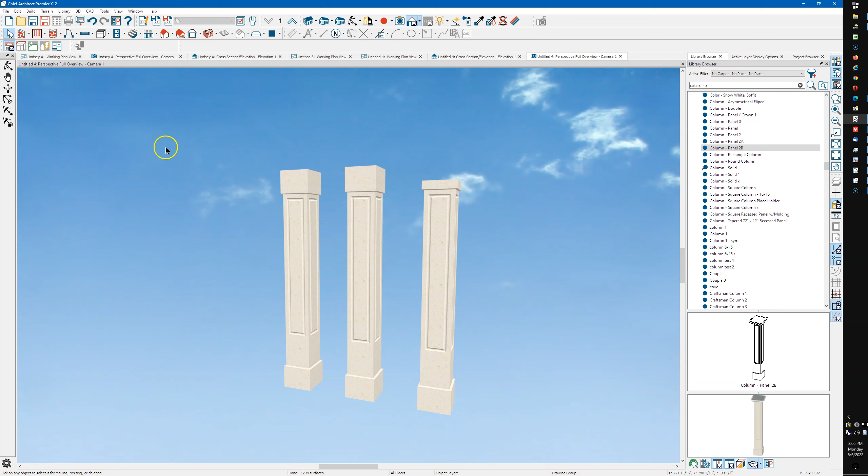Alright, this is X12. We're back on changing up these library column symbols. This is just a copy of the original, which came out of one of the bonus libraries. This is just a copy of this, and this is what we're going after.

So I want to make this 4 inches up here. That's the basic idea.

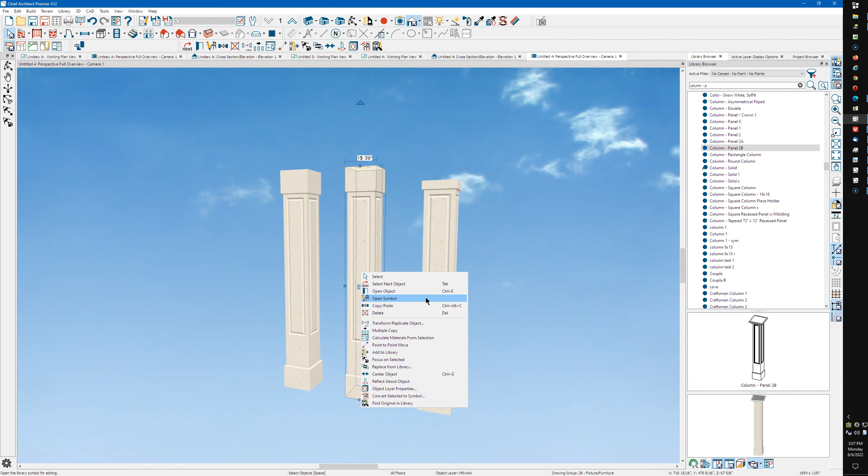So if we open the symbol and go over here to sizing, we're going to see where the stretch plane is, a single stretch plane, and this is how it comes from Chief. You've got a stretch plane here, and in the z-axis, if you stretch the symbol up or down, it's going to stretch about this plane.

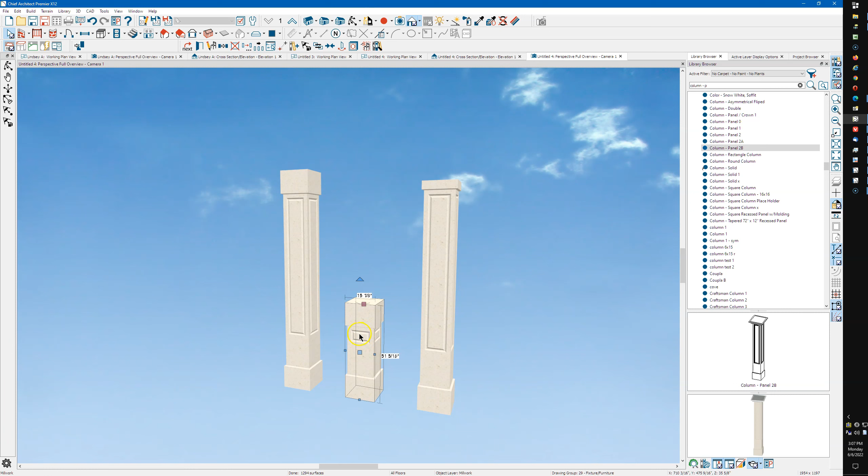I can stretch it down like this, compress it, and this raised panel part just gets smaller, or I can raise it up, same thing. This stays the same, this center part just expands.

So I'm going to control Z a couple of times, just open the symbol back up, and I'm just going to change this.

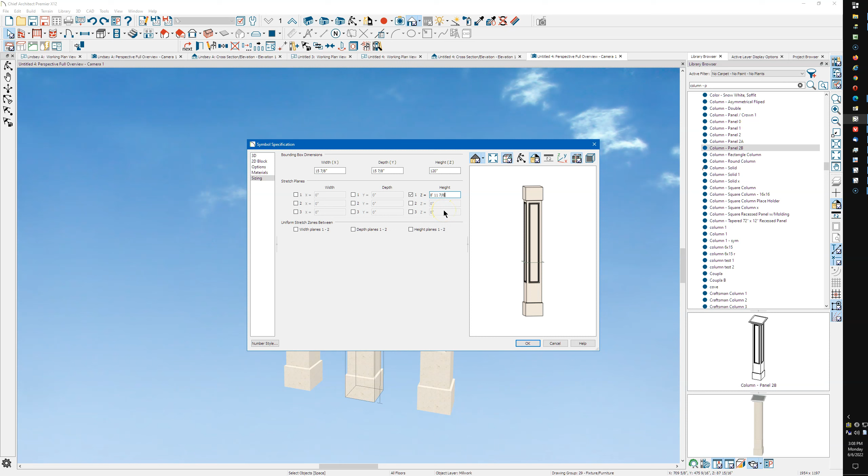I know from the previous video that this is 8 feet 11 7/8. Hit tab. Then what I've done is I've put the stretch plane right up here at the top. And I'm going to say OK.

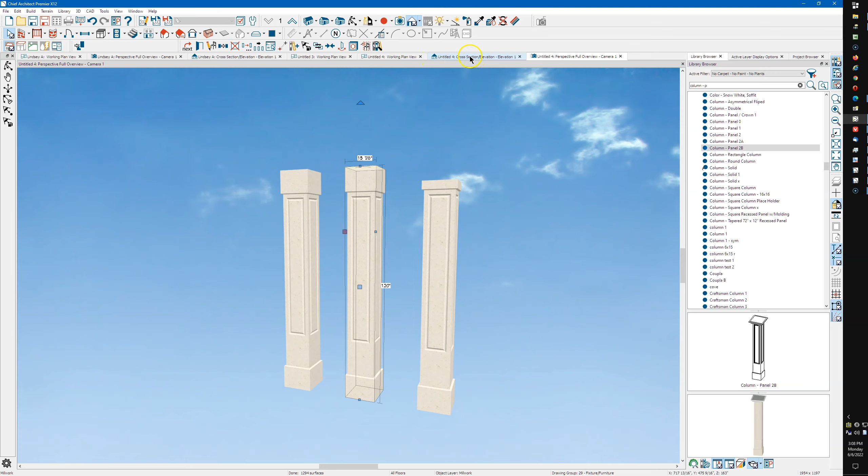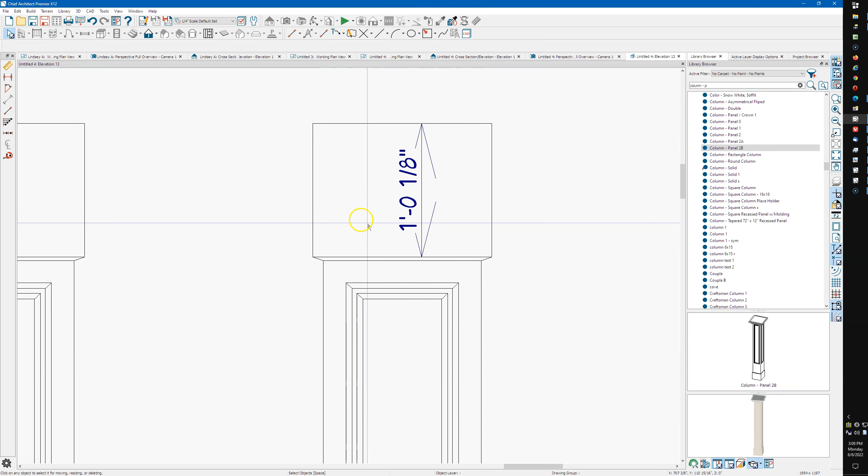And I'm going to do CAD detail from view. Let me get this dimension. So I want to reduce the height of this symbol so that this top piece right here reads 4 inches instead of 1 foot and 1/8.

So we go back over here. I'm going to put minus 12 1/8. Hit tab. And you can see that took it away completely.

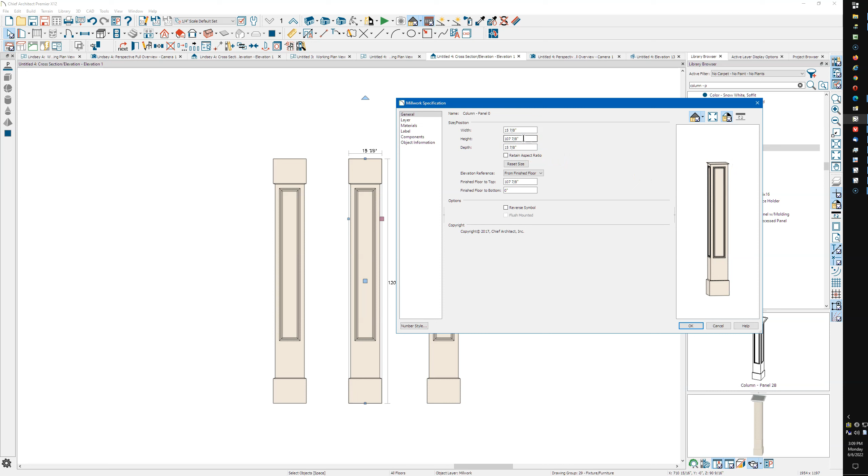And then I'm just going to add 4 inches to that. Hit tab. And then you can see that added 4 inches back. Say OK.

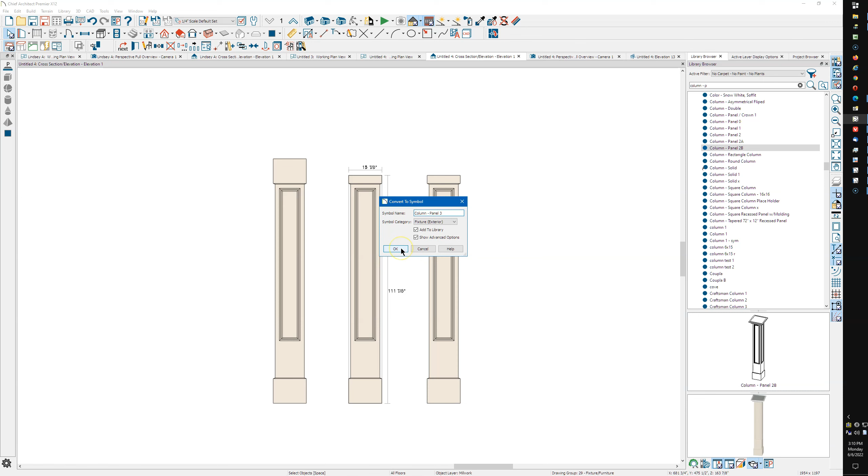Now I'm going to make a new symbol. Say OK. Make this 30. Go to sizing. Just going to use 50, which is what the original was. Say OK.

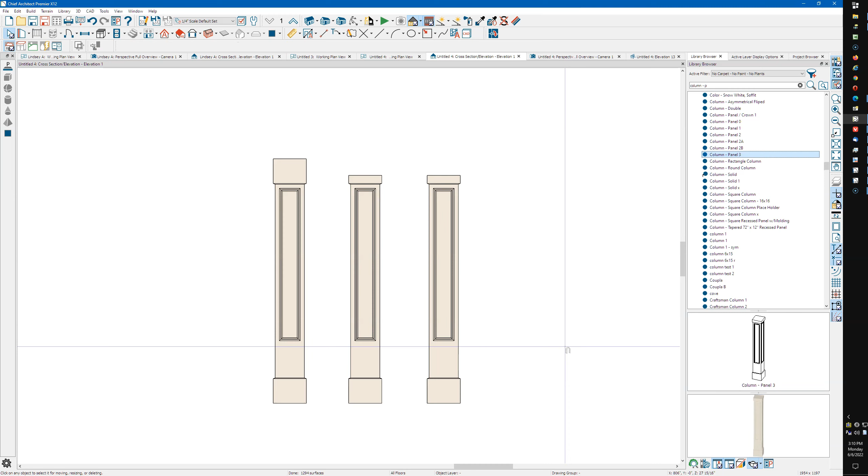Let's put this over here. Now this is the one we just made, it's a new symbol, and it's set to stretch just like this original does.

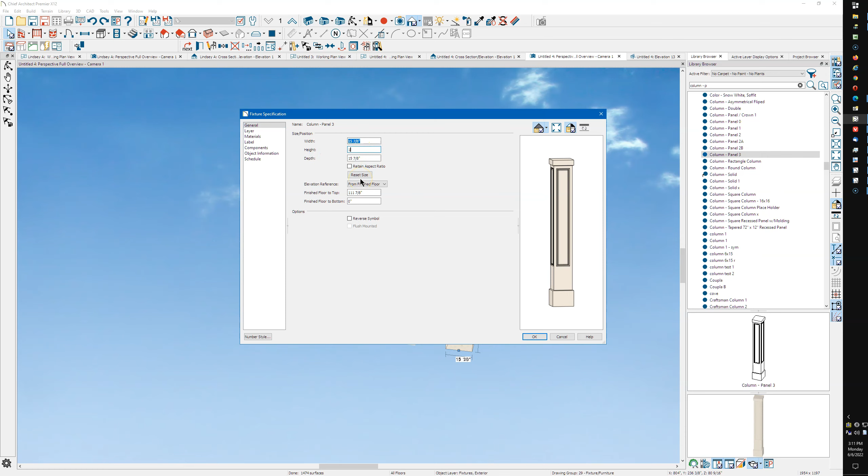So you can use the same basic techniques to change this. I'm going to open this, put it back to 120. Open symbol. Now you can see here that it's still, the symbol still thinks it's 111 7/8.

So if you wanted a new symbol that's 120 inches tall, you'd need to save this. You'd need to create a symbol, you need to go through this process again. You don't have to, but to save this in the library as a symbol with these parameters, that's what you would want to do.

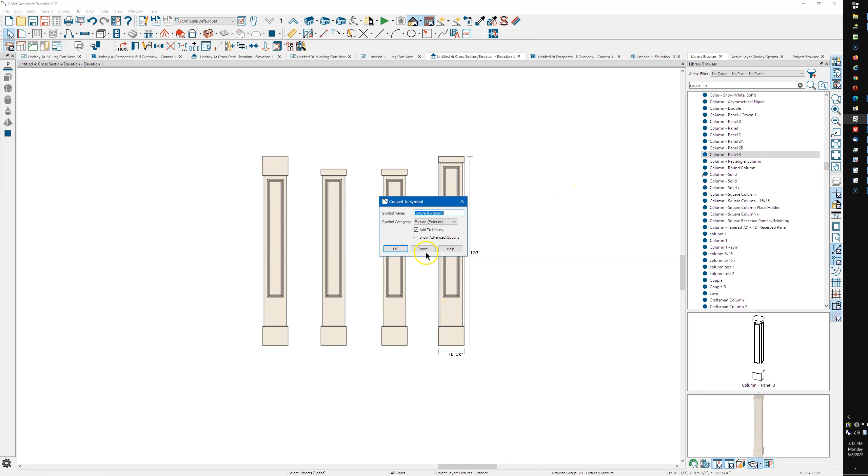You could do the same thing down here. If you wanted this center or this panel to come down lower on this face, you could do the same basic thing here. You could put a stretch plane down here. You could reduce the size. All you're doing is just making iterations of the same symbol.

You could change the size of this down here, you can make it larger or smaller. And again, like the previous video where I showed how to remove this top completely, you could do the same basic thing down here. You could remove this piece completely.

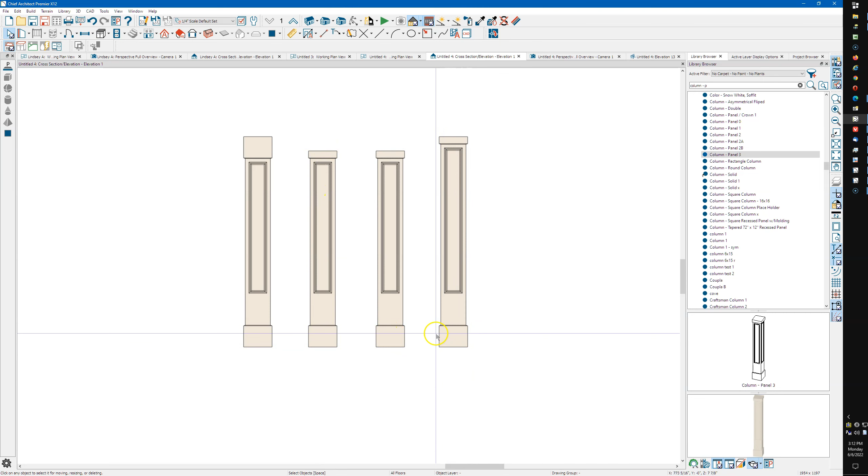You can come over here and use the delete surface tool. Add a new base, whatever size or shape you wanted. And then create a new symbol from all of that, and just keep going. You can just keep modifying these until you get what you need.